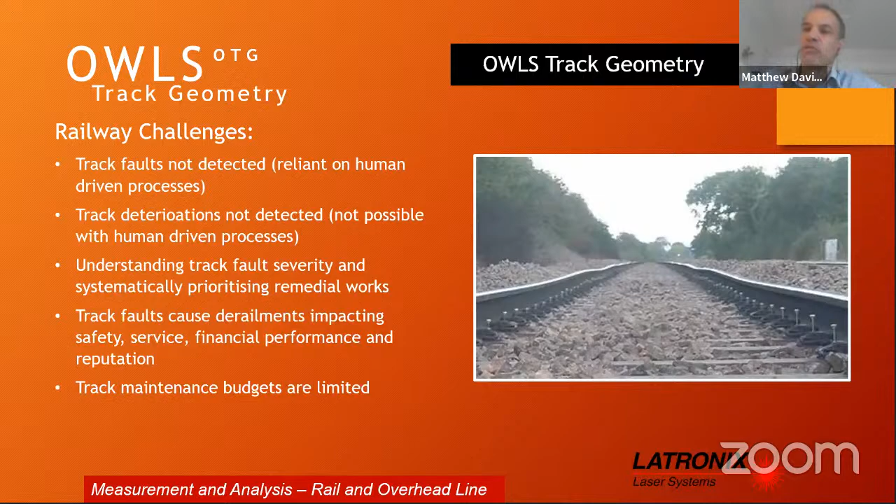So from our perspective, when we're thinking about these challenges, we understand that there needs to be a solution to detect track faults and to detect if there's any track deterioration over time, and to automatically generate alarms. That means that when we identify a serious fault, the railways can immediately impose temporary speed restrictions to enhance safety until those track faults are investigated and, if needed, remedied.

It also means that, if we have data, we can actually understand the severity of fault, and therefore we can target track maintenance budgets on repairs where they're most needed. We're maximising the value of every pound, dollar spent on track maintenance.

And finally, with the tools that are available today, if we make a track repair, we need to immediately validate if the repair has been done correctly and if the problem has been rectified. And again, with modern systems, we can do that, and that can be done on the fly, on the go, by the repair teams in the field to validate the quality of repair work that's done.

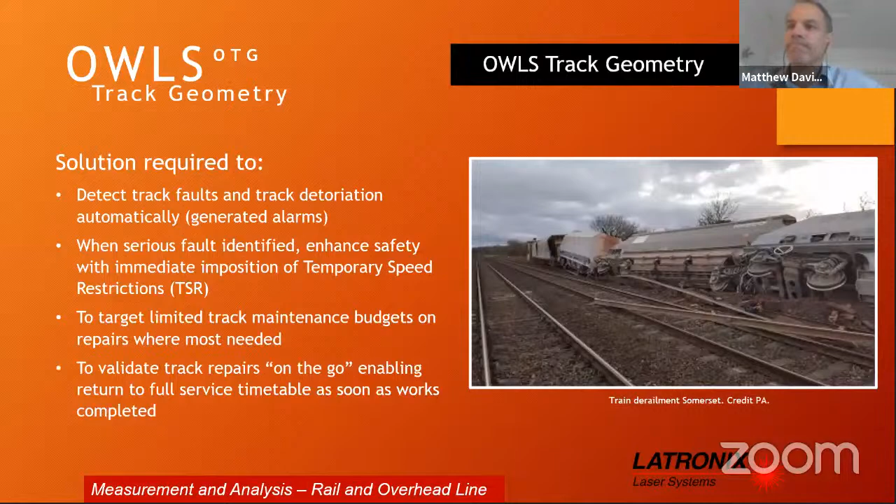So for 10 years, Latronix have been delivering the OWLS track geometry system, and that's been keeping railways safe and efficient by monitoring track quality. And what do we monitor? So track geometry measurements are laid down in a set of European standards, and we monitor in accordance with those European standards. We're monitoring horizontal rail alignment, vertical rail alignment, rail gauge, cant, twist, and indeed we can also detect broken rails through inertial components that are in the OWLS track geometry system.

The systems themselves are very easy to install. They don't have moving parts, they're very easy to maintain. In fact, there's almost no maintenance required, and they're built for any environmental and climatic condition. And indeed, the systems have been deployed as permanent installations on locomotives, and they can be deployed on commercial locomotives that are running daily on track, or they can be deployed as a portable solution on yellow works vehicles, so on excavators, for example. It's a very flexible, compact system.

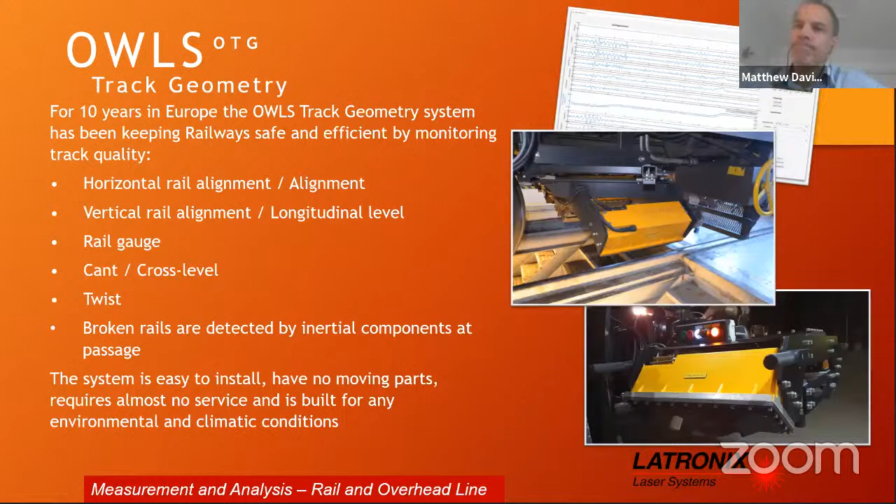So one aspect is collecting the data. The second aspect is, what do we actually do with that data, and how do we turn it into meaningful information? So the OWLS track geometry system has a set of analysis software and is managed through an interface. And in that interface, we can set predefined track quality alarm limits. They can be set in accordance to standards or not, depending on the needs of the customer.

And that data can be analysed and processed on the train and displayed to the train operator or the operator of the works vehicles, the team on site, or monitored in the back end. And that can be done in real time. Data is transferred via GSM or any other transfer interface that's suitable to a cloud storage solution. So the data is readily accessible for post-event processing.

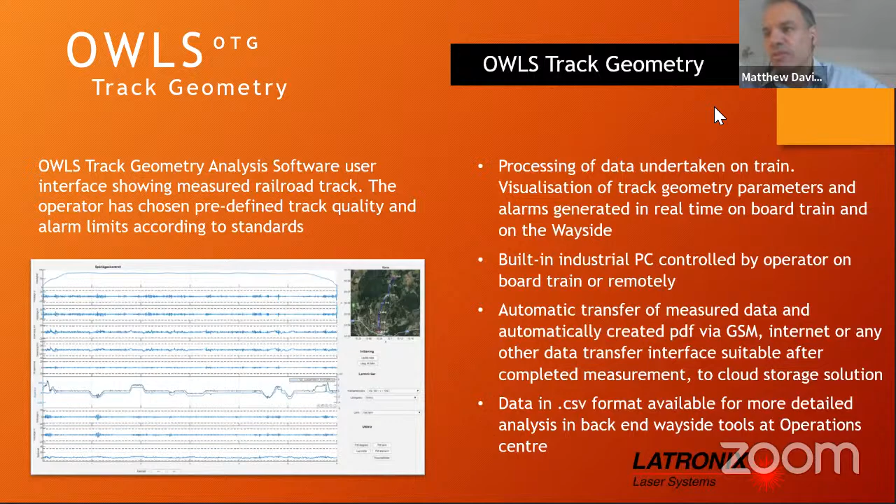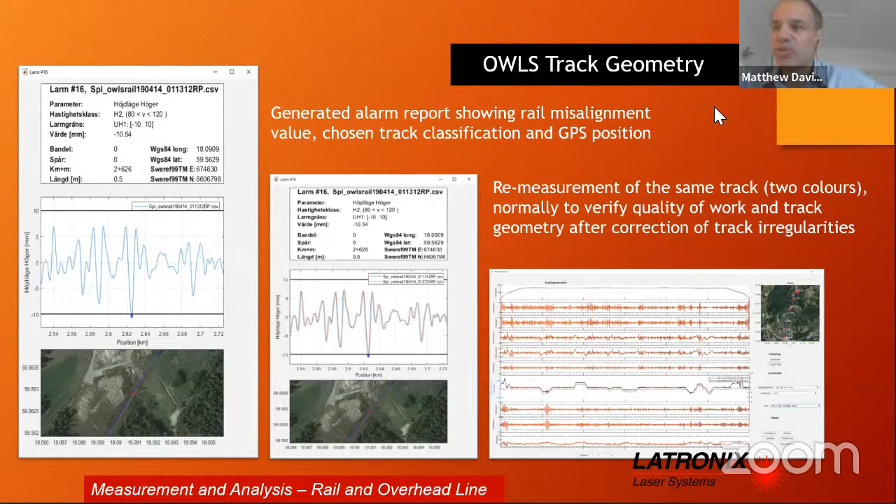The system itself generates alarm reports in the case that an alarm is identified. And that can be displayed to the operators together with a map and GPS position, so it's very easy to identify precisely where the alarm was triggered on the track. And it's also possible to compare data sets. So if you remeasure the same track at a later date, you can very easily identify if there's been any change to the track data. And obviously that's particularly important if you're doing remedial works.

So, as I mentioned before, the OWLS track geometry system can be deployed as a permanent installation on a measurement train, or on a commercial locomotive. There's a mobile solution available for locomotives and works vehicles. It can be acquired as a service with periodic scheduled monitoring, or as a one-off measurement service. Ultimately, our philosophy is to empower the customer, to put you in control of your data.

So maybe just to wrap up, railways are blighted by derailments, and research has shown that 15% of derailments are caused by broken rails, and a further 15% are caused by track geometry issues, including buckled track. Knowing this, and knowing the cost of derailments in terms of safety, in terms of reputation, in terms of financial impact, I guess the challenge for railways is, can railways afford not to invest in continuous track geometry measurement?

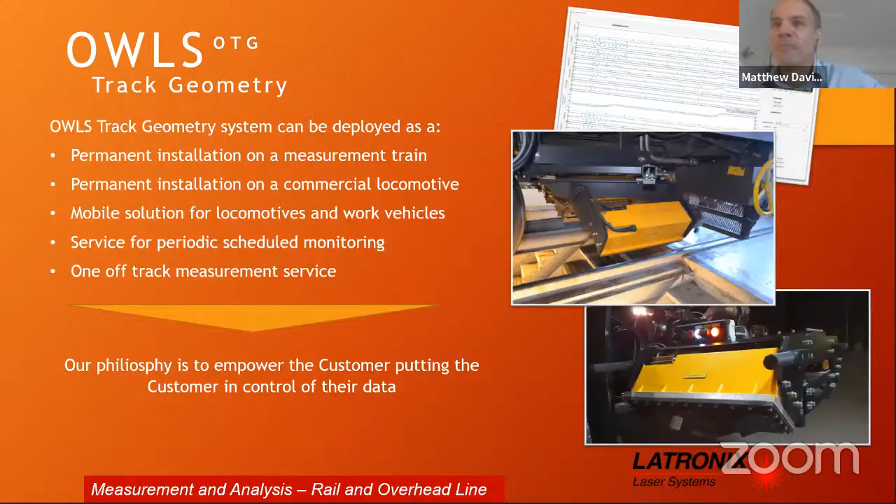Thank you, Matthew. Mattias, you're still on mute. Okay, thank you, Matthew. There we go. Thank you for the presentation. I will highlight some more information about the system and our company. Just a moment. Are you managing there? As always, troubles when it's live. So, okay. I can't open the file right now. I can perhaps just talk then.

So my name is Mattias Mattsson, and I am the CEO of Latronix AB. Really short about Latronix. We are a Swedish company that develops and manufactures non-contact measuring systems for railway applications, both optical with lasers and inertial with gyros and accelerometers. Latronix CTO, our technical director, Björn Skatt, is also attending this webinar. He is currently somewhere in Stockholm in a measuring vehicle. Hi, Björn.

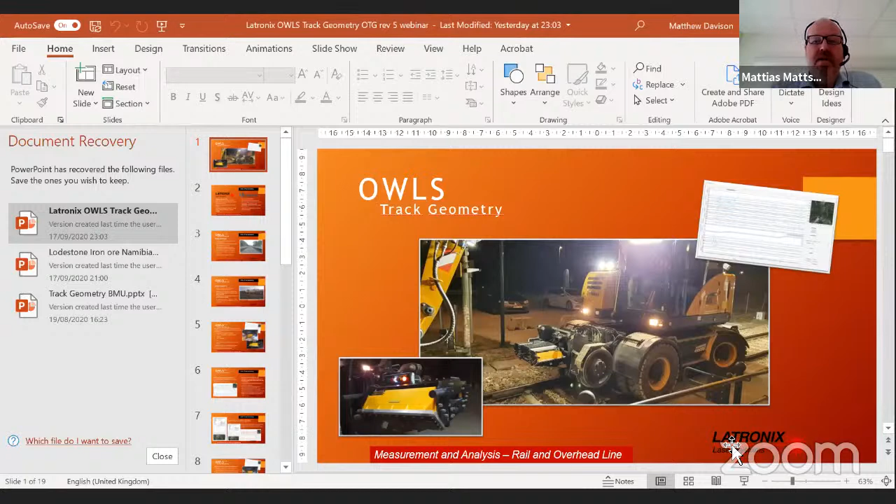The excavator on the picture has been prepared with a mounting bracket and two industrial connectors, one to 24 volts and one to a tachometer. It takes less than 2 minutes to mount or dismount the system. That's all it takes, so after 2 minutes it's ready to measure. The operator controls OWLS with a laptop or iPad with a wireless connection. And this is creating accessibility and affordability.

Matthew already mentioned all measured track geometry parameters. For Cape gauge, we divide OWLS into 2 units, one with sensors and one with other electronics. For standard gauge, all is built into the same unit. All processing of data is undertaken on train inside the system. And since all data are automatically transferred to a cloud storage solution after completed measurements, both the operator on the train and people elsewhere with connection to the cloud storage solution have simultaneous access to measured data and can analyze measurements.

With OWLS track geometry, you as a customer will have instant access and control of track geometry data, regardless of whether you are a measurement expert or operator. You can make decisions and act depending on the conditions of the track. For example, reduce train speed as an operator.

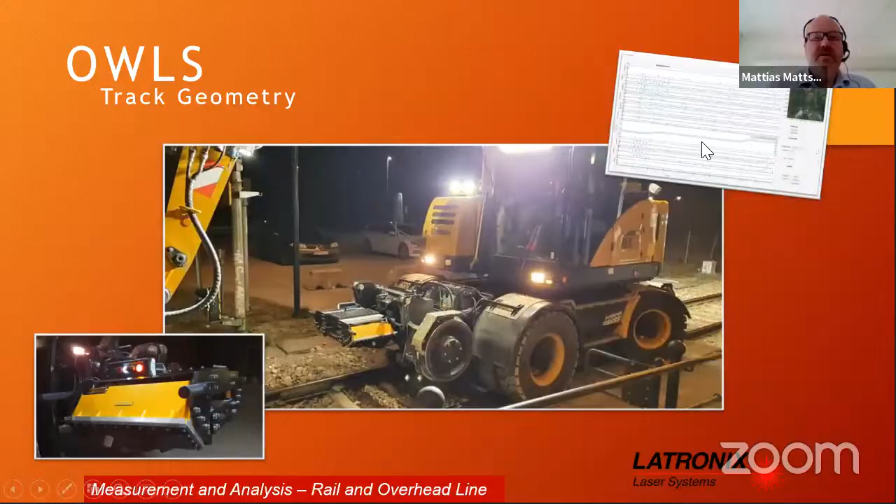So, I'm sorry I couldn't show you my slides. Now I would like to hand over to our much appreciated customer, Eric from company Eber Dynamics. Thank you. Okay, then we'll see if my screen is working. Can you see anything? I can see your screen. You just need to go into presentation mode. There we go. Like that, perhaps? Perfect. Perfect. Okay. Thank you very much, Eric.

Over to you. Yeah, I'm very glad to participate in this webinar. I like Africa a lot. I've been traveling there, visiting friends and some relatives. I think I've been in 8 or 9 countries. It's a great continent. I like it a lot.

My professional background is that I did some 15 years as a track engineer at the Swedish Transport Administration, where I worked mostly with measurements in the track. And the last 10 years, approximately, I've been doing development and consultancy in the company Eber Dynamics.

So first, I would like to take the view from the Swedish Transport Administration, where I had a cooperation with Latronix within these questions. The Swedish Transport Administration orders from another company that does the measurements, and they have 4 measurement cars measuring approximately 60,000 kilometers per year with those 4 cars. For the main tracks, they measure about 6 times per year, and side tracks and so on 1 to 2 times per year. So there's a lot of measurements. And Latronix has been a provider of their solution since 2009.

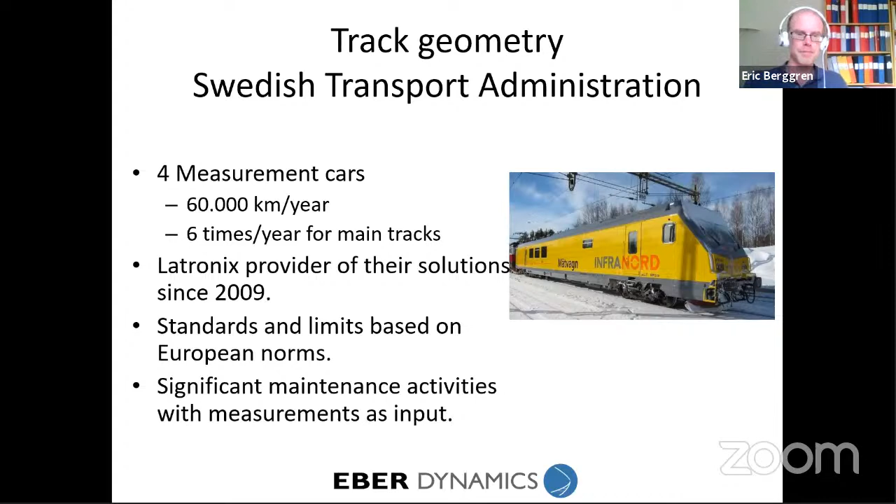All standards and limits that are used are based on European norms with some small modifications. And of course, the Swedish railways do most of their maintenance in track based on these measurements as input. The goal for track geometry measurements is to keep the safety of the track, to find problems in track before there is a risk of derailment. That's the number one thing.

And if you tighten the limits a bit, you go into comfort, where you want to have good comfort for travelers and for railway freight. And of course, you want to do the measurements to do efficient maintenance, not only go out on alert limits, but to build an efficient maintenance strategy. Still in Sweden, a large amount of the maintenance work is initiated by limit exceedances. But with digital data that you have in your own organization, you're able to do some trends and so forth as well, which I've exemplified in these different pictures.

So in the top picture, you see just one position in the track over, I think, 16, 17 years. And this position we passed about 50 to 60 times during these years. We can clearly see that the deterioration is quite large at times. Then we see a very large improvement, a lower value, and then the deterioration starts again. The biggest jump is actually when they renew the track. And after that, it's normal tamping.

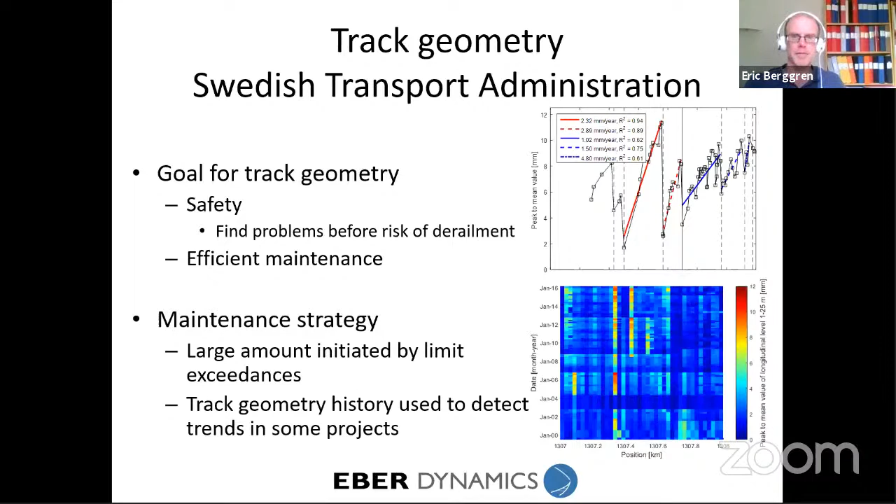A trend now for the Swedish rail is that with only 4 measurement cars, they often need to wait quite a long time to get a measurement. And when they do maintenance work, they want to see directly: is the problem fixed or not? Can we increase the speed? Is there a danger yet? Even though you've been there with a maintenance machine, you cannot be fully sure that the crew did a good job.

So that has been a driving force for Latronix to build a simple yet accurate, affordable and flexible system. The last tests are being done in Sweden right now, and it proves very well. The Swedish Transport Administration is really happy with what's going on.

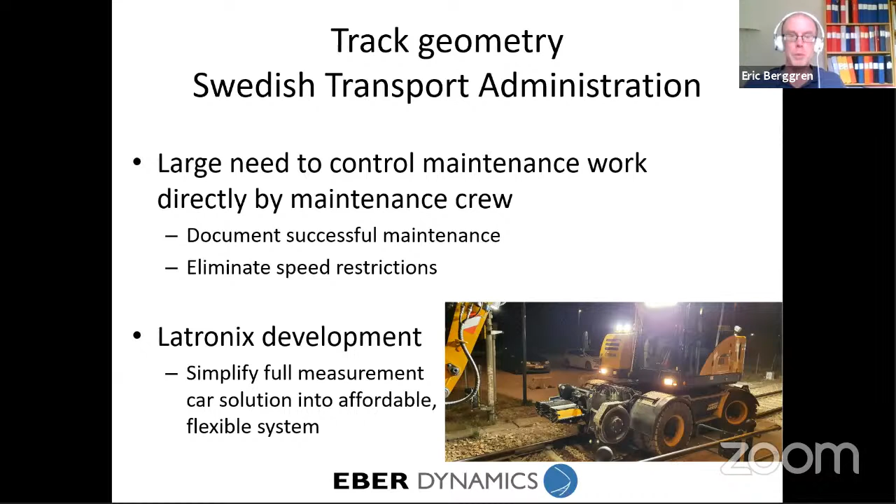And now in my company, I work with the development of a measurement system called ETL, Eber Track Lab, in close cooperation with Latronix. Basically we have 4 track geometry systems fitted together, but at different distances from the loading wheels. With that configuration, we are able to see how much the rail deflects by comparing the track geometry for the different positions. So we can present deflection and track stiffness for customers here in Sweden and elsewhere in Europe. Okay, that was very short, my perspective on track geometry and what you can do with it.

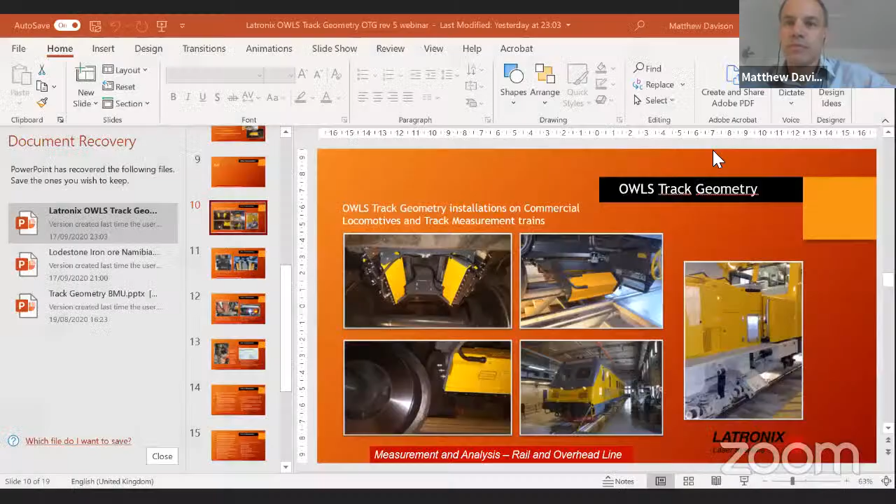This is a slide. Okay, not a commercial locomotive. I mean, it has been installed on commercial locomotives, but these are some pictures of an installation on a measurement train in Sweden. But in principle, it's kind of under the locomotive. So you're not necessarily going to get rain on it, are you? Can you get rain on it? Well, you potentially can pick up spray, potentially. Okay.

And moisture. But yes, so as Mattias had mentioned previously, the system is mounted underneath the vehicle. It needs to be mounted close to the loading point, so close to the axle, within maybe a meter of the axle, to ensure the accuracy of measurements. And as Mattias also mentioned, we do provide customized mounting brackets, so it can be fitted to different locomotive types.

And, as Mattias mentioned, there's really no moving components in the system, no moving parts. So it's inherently very reliable, and really the only maintenance, if you don't take the full ingress protection packages required, is to wipe clean lenses if they get covered in dust or dirt to an extent where it's impeding the optical measurement. And if that happens, the operator will be displayed an alarm, so they can take action to clean the lens.

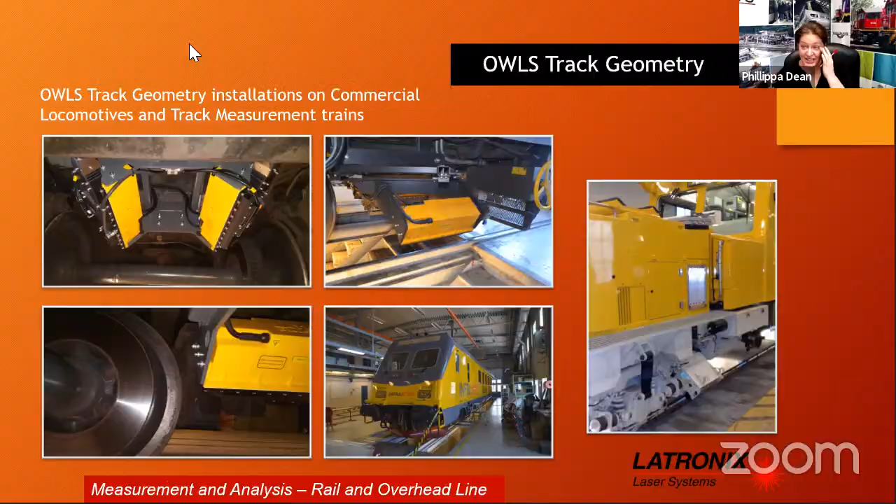All right, so Matthew, you can exit out of there. Rakesh, thank you for your question. We'll answer it now, because the question is about on-site technical support. Yes. So on-site technical support will be available for the system. And initial training and all of that? And initial training, exactly. We actually have a specific training package, a combination of remote training through tools such as Zoom, on-site training and initial setup of the system, and then ongoing support to help with the actual analytics and the data analysis.

But actually, I think users will find there really won't be much need of a dedicated on-site technical support team, because the system is simple, doesn't really require any maintenance, and the graphical user interfaces and the use of the data and the information provided is extremely intuitive. So yes, there will be on-site technical support available, but we don't envisage a great need for that support.

Thank you, Matthew. Okay, so I have two questions here. The first is, can the system be provided as a service instead of selling the system? So instead of the operator buying the system, could they use it on a service basis? So answer that, and then we'll move to the next one.